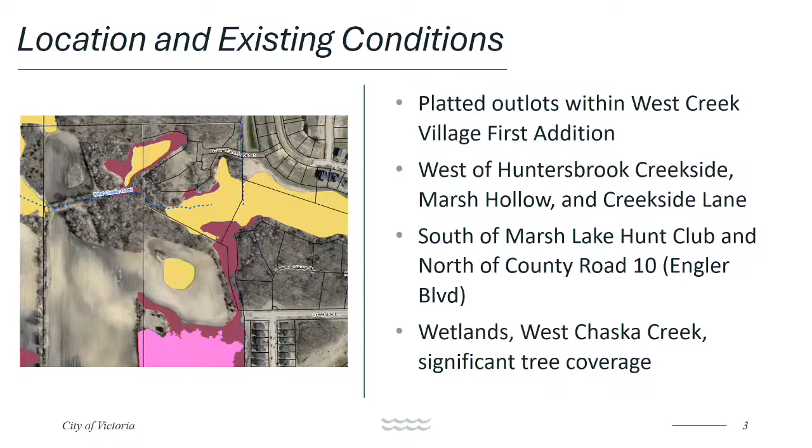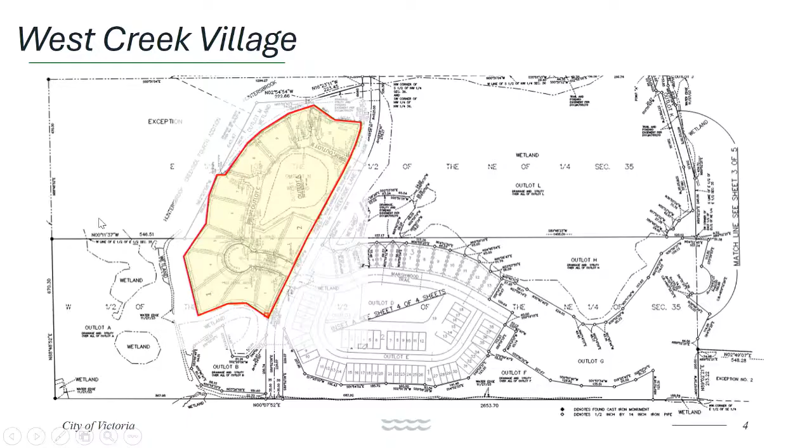There are some portions of wetlands on site, and a portion of the West Chaska Creek also runs through the area, with pockets of tree coverage. Here are the 13 lots that were part of the West Creek Village development on the north side of Creekside Lane. The rest of the area is proposed to be outlots for stormwater and wetland preservation, which align with the approvals for the West Creek Village development.

Six or seven of these homes are proposed to have access on a public cul-de-sac stemming from Creekside Lane, and there will be three private lots on a private drive.

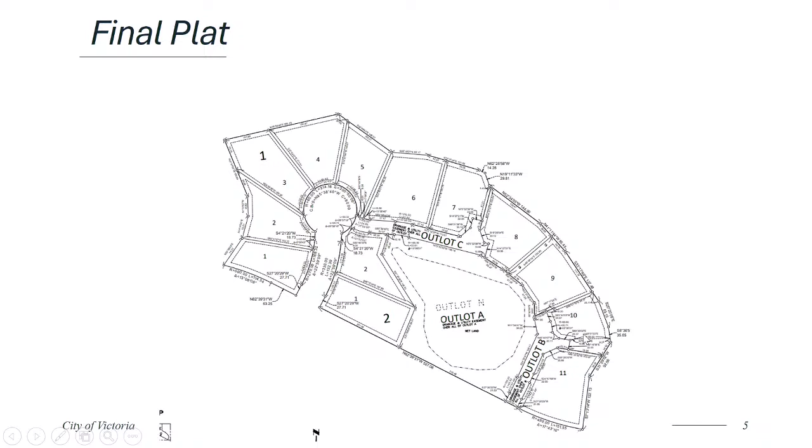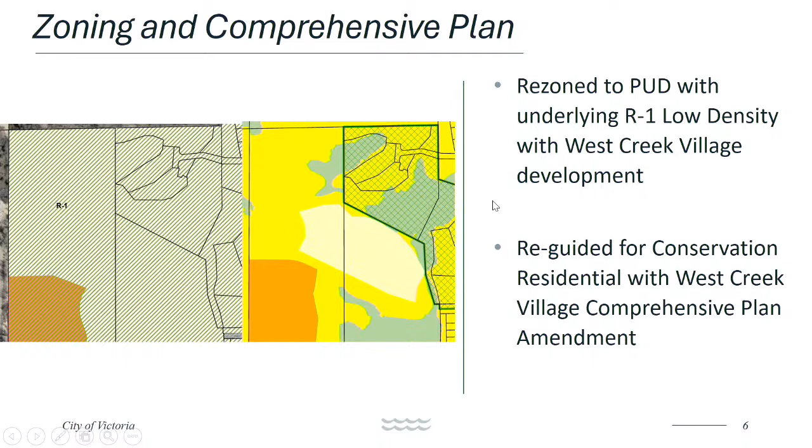For the zoning and comprehensive plan, this area was rezoned to R1 low-density residential, or actually planned unit development with underlying R1 low-density residential. That was done with the West Creek Village development when they received their preliminary plat approvals. They also had the area guided for single-family homes changed to conservation residential with that development, and that amendment was approved by the Metropolitan Council. The reason for that change was to have the higher area home lots within conservation residential, and also because they are within the Shoreland Overlay District, preserving some of the natural amenities out in this area.

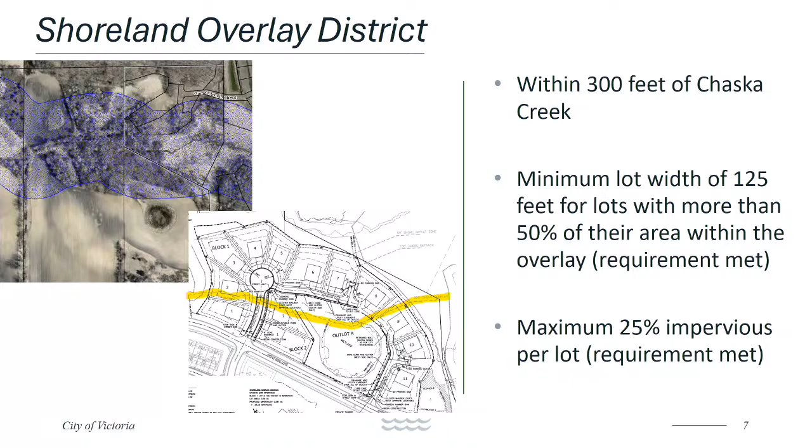All of these homes were required to have a minimum lot width of 125 feet if more than 50% of their area was within 300 feet of the creek, and they all have to comply with the maximum 25% impervious surface per lot. The applicant has verified that all of the lots within 300 feet of the Chaska Creek would comply with that requirement.

For park dedication and pedestrian connections, they have sidewalk connections from the cul-de-sac that connect to the trail along Creekside Lane. They also have trails within the larger West Creek Village development on the south side of the site, which you may recall extend over to the Marsh Hollow neighborhood, so there are various walking amenities in this area.

There is also a private park located next to the townhomes, but it's likely assumed that anyone living in the single-family homes will utilize the Marsh Hollow and Huntersbrook parks when those are developed in the future. Regarding park dedication, their requirement per our code is 0.606 acres, or about $63,700 in park dedication. We anticipate the fees, since no park amenities are proposed with this final plat.

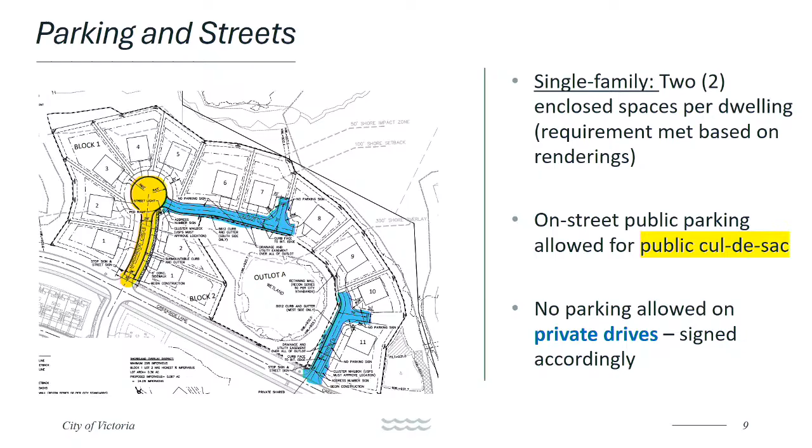Looking at parking and streets, each single-family home is required to have 2 enclosed spaces per dwelling. Based on the renderings provided, we anticipate that to be met. They also have a public cul-de-sac which would allow parking on both sides, granted they don't impact any driveway placements. The private drives would not be allowed to have any parking on them and would be signed accordingly.

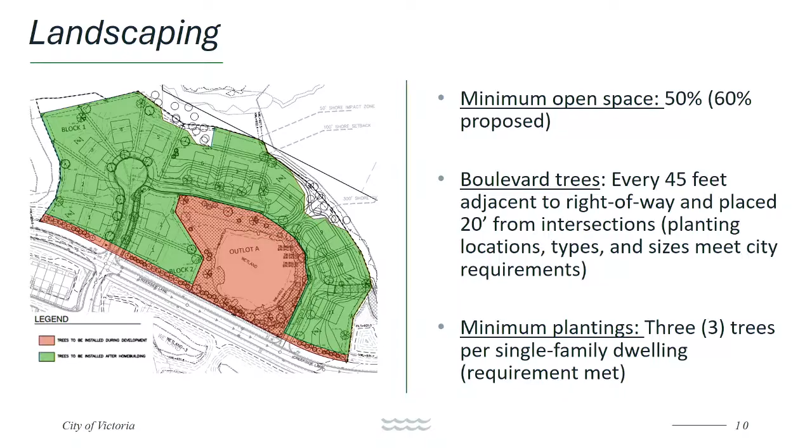Regarding landscaping, there's a code requirement of a minimum of 50% open space. They are proposing 60%. They are also providing boulevard trees with spacing, type, and sizes that meet our requirements, and they're providing the 3 plantings per single-family dwelling as required.

Regarding tree preservation, we allow 20% removal without mitigation or replanting throughout the site. They are proposing to remove 64% of the existing tree coverage after the West Creek Village removals, so their mitigation requirement comes out to 456 inches. They are replacing 337 and a half of those, leaving 118 and a half remaining. The applicant is proposing to contribute a cash fee to the city's tree fund in lieu of full replacements for this development.

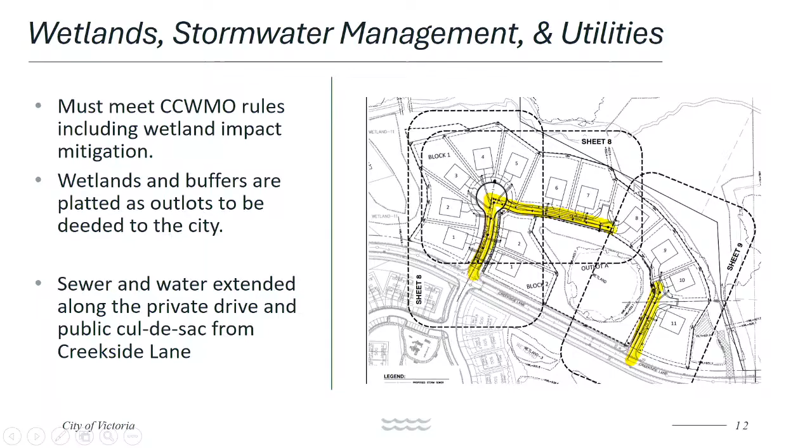For wetlands, stormwater management, and utilities, they must meet the CCWMO rules, including wetland impact mitigation. They are proposing to place wetlands and buffers within outlots deeded to the city, and the sewer and water would be extended from Creekside Lane and down the private drives to serve those new homes.

With that, I have some suggested conditions for the city council to consider this evening. We don't have any unique standards here—these are all of our boilerplate requirements, such as providing a letter of credit, getting all necessary permits, complying with the plat opinion, and entering into a development agreement, things like that. So I only have one sample motion for you this evening. Staff can stand for any questions, and the applicant is in the audience tonight as well.

Thank you very much, Mr. McCann. Those private streets—will those be maintained by an HOA? Correct. Okay, very good, thank you. Council, other questions or comments?

Gone through a lot of this with them. I don't think there's anything that jumps out at me.

Anyone else? I guess I just have a question about the parks. You said the likelihood is probably the two parks we've been discussing and designing. I know they can ask for fees in lieu or park dedication fees. I'm just wondering if there's any type of partnership there, since they might be going toward their lake, where that could help us with those two parks more than just this amount. I don't know if that's even a possibility, but we're looking at building two big parks in that area, and if this area is going to use it, I know it's not a lot of homes, but to share in that. We've talked about trying to do more to take care of our parks and build them, so I was wondering if there's anything out there we can do.

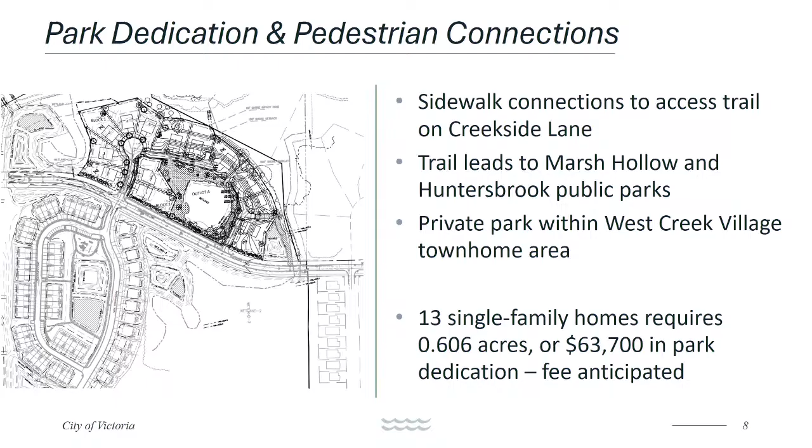Thank you. Very good. Any other questions, comments?

I want to go down the state statute. Is there a limitation on what we can charge under state law, or is there not? Mayor and Council, it's a great question, and it's been a hotly contested topic. There is a court case out there arising out of the city of Burnsville that sets parameters around what's legal, what the courts have said is legal. There is a generally held view that the court's sustaining of Burnsville's amount is probably near the top end, but there is no statutory maximum on that, though there is a perceived maximum based on that court case.

Thanks, Greg. Sorry, I kind of jumped in when you were getting to that. That's great, I'm just actually moving on to a different topic than the park dedication.

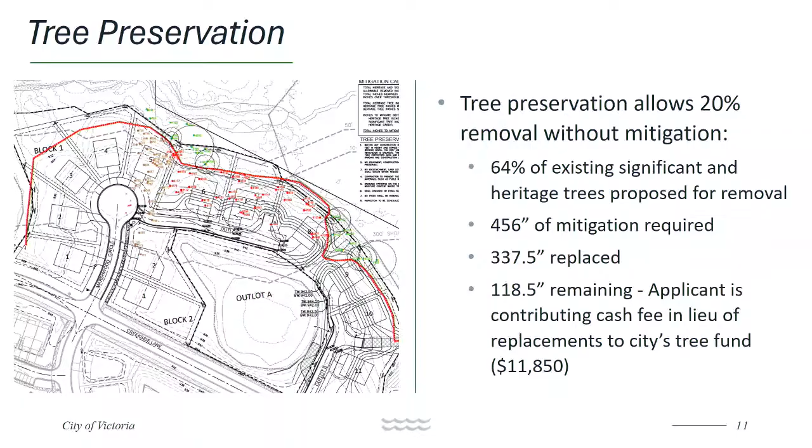Any other comments, thoughts? I guess I raised my eyebrow to the amount of that 118.5 inches remaining that they're going to pay, but then I kind of think, if there's not enough space for it and it's going to cause issues, then... we want as many trees as possible, but it's got to also fit.

Very good. All right. Seeing no further discussion, I will entertain a motion. Adopt the resolution approving the final plat for Enclave at Huntersbrook. We have a motion. Can I get a second? Second. We have a motion and a second. All in favor signify by saying aye. Aye. Any opposed? Motion carries.

Our next item on the agenda this evening is item 6.5, to consider a determination of an environmental assessment worksheet or environmental impact statement for Bell Maple Farm. Kicking off this item this evening and introducing our consultant is City Engineer Kara Guerin.

Ms. Guerin, welcome. Good evening, Mayor, members of the City Council. We have representatives from Stantec here tonight that I will be passing this over to, but you have a detailed memo from Stantec in your packet. Stantec staff is going to give you a general overview, and then I'm going to share a little additional information about infrastructure planning, since that question seems to have come up in communications quite a bit around this topic. So with that, I'm going to turn it over to Courtney. Okay, very good. Courtney, welcome. Please introduce yourself for the record.

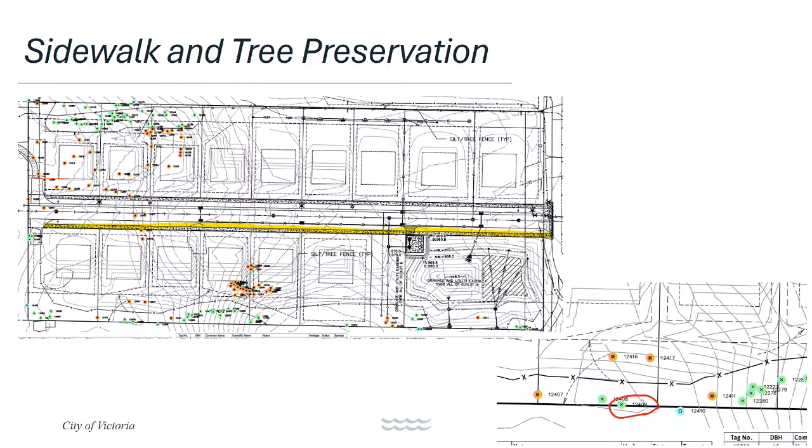Mayor, members of the City Council, I'm going to go a little bit high level relative to infrastructure planning because of the questions that have been raised about some of the decisions around particularly sewer sizing of the area. So big picture, sewer and water infrastructure planning happens often and behind the scenes and isn't necessarily something that's routinely reviewed with the city council.

It first begins with the evaluation of the city's comprehensive plan, which occurs every 10 years. So on a 10-year basis, your engineering team is reviewing sewer and water system expansions in order to serve development. That gets further refined as actual development comes forward, and then specifically on a parcel-by-parcel basis, sewer and water are installed to serve adjacent development.

And the reason for all of that is to make sure that it doesn't become cost prohibitive to provide city services to property as it develops. So we have to come up with an orderly, logical way to put that infrastructure in the ground.

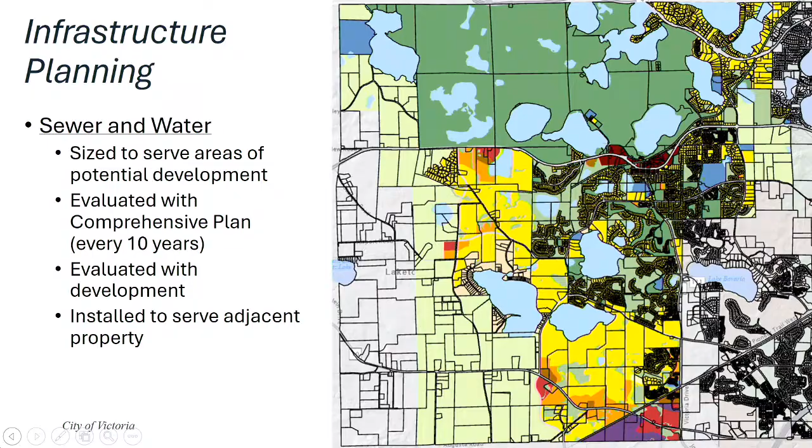But speaking of sanitary sewer specifically, you have, let's say, an 18-inch diameter pipe. Only so much waste can flow through that pipe. So the size of the pipe constrains how big of an area can be developed and served off that pipe. So we're having to make these decisions well in advance of when development happens. And I'm just going to run through a couple of examples for discussion purposes.

I don't expect you to follow exactly where I am on this map, but for reference, this is the Auburn neighborhood and the Lake Bridge neighborhood. We have a park right over here. As development occurred throughout, like between 2007 and 2014, a trunk sewer line was extended through this development, and we had to plan and size that infrastructure to serve essentially everything in our orderly annexation area.

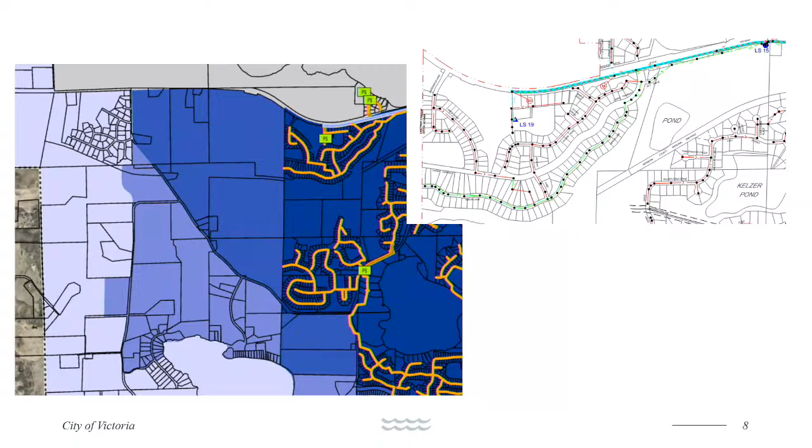So we have to make decisions about sewer sizing well in advance of development to make sure that we have a large enough pipe to serve the area.

Another similar broad scale look at that has been in our south growth area. The first piece of infrastructure that went in the ground that ultimately serves the south growth area went in 2003 as part of the Watermark development. So we put a 30-inch pipe in the ground on 81st Street by Kirklocken Park that ultimately serves this whole giant growth area. And finally, right now, we are looking at the West Creek Village development that you were just looking at, which extends a trunk line to serve this whole area.

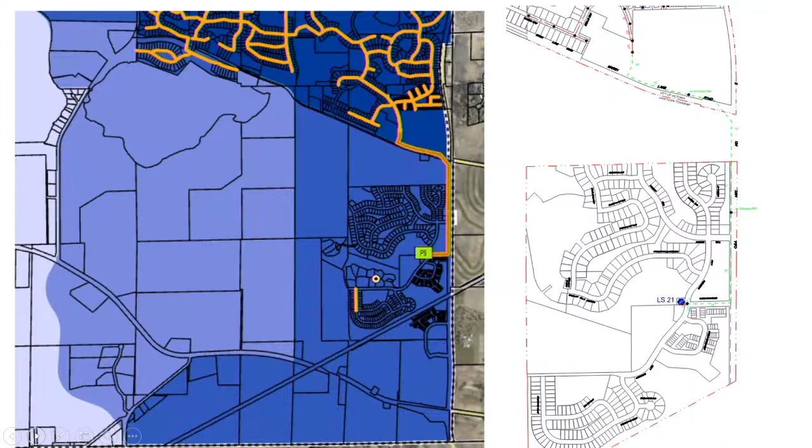But then even on a more micro level, so what you're looking at on the screen here is the Deer Run neighborhood. So this is Ridge Ponds Drive, which is that really long dead end that we've had a lot of conversations about over the years.

When this development went in the 90s, with the last phase being about 1993, a sanitary sewer stub was extended in this location to serve all of this area, and a roadway connection was built. There's actually pavement and curb and gutter out at the end of that neighborhood, with a short dead end that was put in to serve it.

If you recall, potential development for this property was just in front of the city within the last 6 months. So from 1993 until within the last 6 months, there had been no development activity. But we had to make those decisions at the time of the Deer Run development to provide both road access and sewer service.

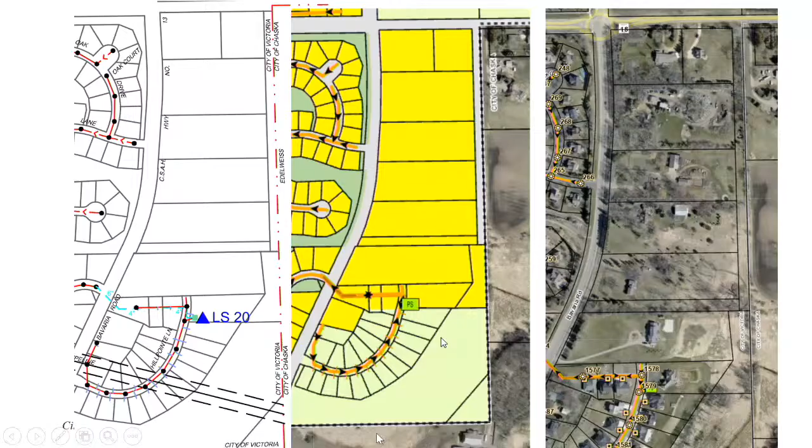There's also a road stubbed through to the property to the north. At the Ghost Plat time, the city took a look at how access would potentially loop back over to Bavaria through some of that Ghost Plat type work that we do often with development.

So moving specifically then on to the subject parcel. We are looking at this property in the middle, and they are looking at extending city sewer from Interlaken in order to serve the area. And so this area is all guided for single family residential.

So what that signals to us and Met Council is that we are planning to extend city sewer to the area. But as we look at how they should construct the specific infrastructure within this parcel, it's necessary for us to take into account what the potential for additional sewer connections might be in the area, so that what they put in the ground is sized to accommodate development around it.

I think we'll probably talk about this a little bit more on a future slide, but the area in question is pretty unique. This development to the north, Fox Hollow, has 3 individual homes on it. There exists a development agreement that says the lots can't be further subdivided, and there's actually an agreement between Chanhassen and Victoria also stating, and the developer also stating, that it wouldn't be further subdivided.

So the development potential to the north is somewhat limited, but at a minimum, we could end up with a situation where septic systems are failing and the city would be asked to provide sewer service to the existing homes. So 1, 2, 3, 4, 5, there might be a 6th up there. I don't know if that's an actual lot there.

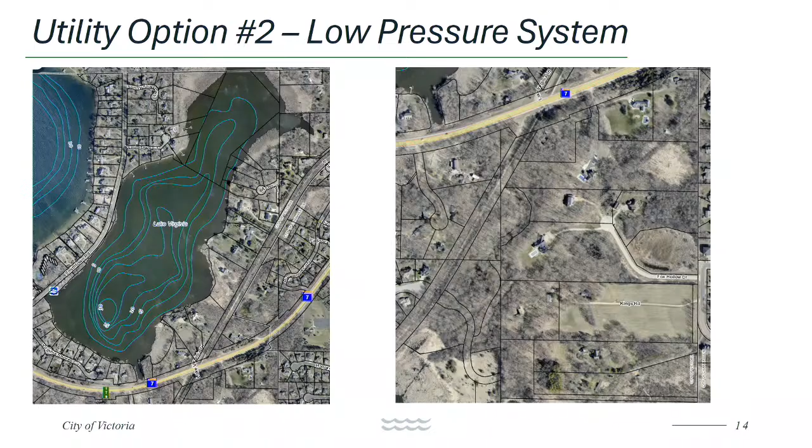So a couple of comparisons between the two options. The lift station option is a little bit easier to plan for system expansion in the future. Just by the nature of the system, it's easier for us to decide how big to make the wet well and ensure we're oversizing it enough for the area, compared to the low pressure sewer system, which has less capacity for system expansion in the future.

But given the constraints I noted on the development property to the north, with the 3 lots and the development restriction, we aren't necessarily seeing a need for widespread expansion. So we do think either system could work in this area.

A second area of difference is related to maintenance. The lift station option requires more maintenance for the city's Public Works Department over time. Public Works needs to come inspect and keep an eye on the lift station with some frequency.

The lift station would be attached to the city's SCADA system, so the city would get alerts and notifications if anything was problematic, like if power was out. But the city still inspects those systems regularly, and there are pumps associated with the lift station that the city would be responsible for maintaining and replacing over time.

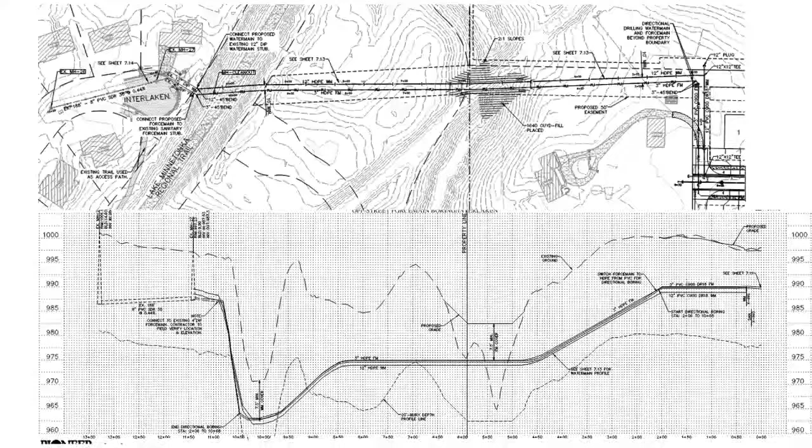When the 12-inch was put in Swiss Mountain back in the 90s, it was assumed that that 12-inch would loop through to Highway 5. Once the University of Minnesota purchased the Tamarack properties, that really made the prospect of putting a loop through there cost prohibitive. So the other alternative would be to look at looping it to the north.

We have sewer that's 40, 50 feet deep in parts of the city on our trunk system. We try to keep the lateral 8 inches under 25 to 30, so they were working within those parameters when they tried to come up with a route through here for this. Okay, thank you.

Just a couple questions from Member Rife on the lift station versus the low-pressure system. I think I understand the pros and cons of both, for the most part. I understand we're not first of a kind for the low-pressure system in Victoria, we have a few. How about around surrounding areas, where are we at with that? I know everything's different outside communities, but we also need to think about that.

Sure, so as usual, I limit my expertise to the city of Victoria relative to surrounding communities. But these are not uncommon systems. They're really common in lake areas where you're dealing with topography that creates a lot of challenges. It's a pretty typical installation.

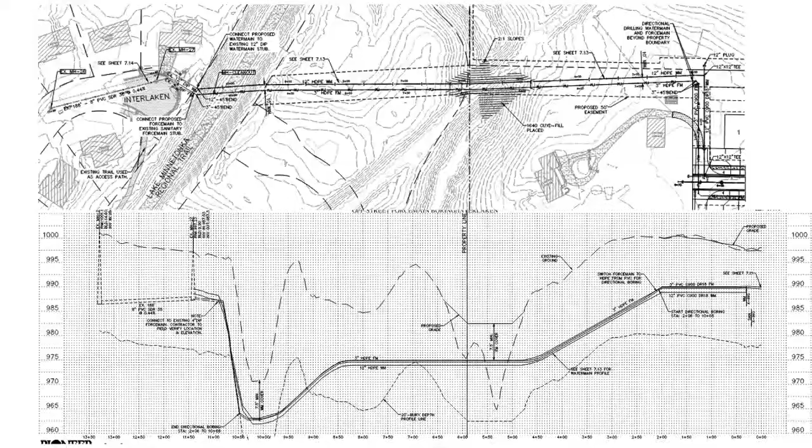And then, am I correct that if we went with the grinder option, any future development in the future would all then have to be on grinders as well, since we're not choosing the lift station option? That is correct. Any additional development in this area would have to have the same low-pressure sewer system serving it.

Do we want to continue on the topic of the sewer, or do we want to have Brian finish his presentation? I have a question about Fox Hollow Drive and those properties - I think that's somewhat relevant to the sizing of the sewer. Why don't we go ahead and let Brian finish up his presentation, and then we will circle back to that question. Thank you. Sure, thank you, Mayor and council members.

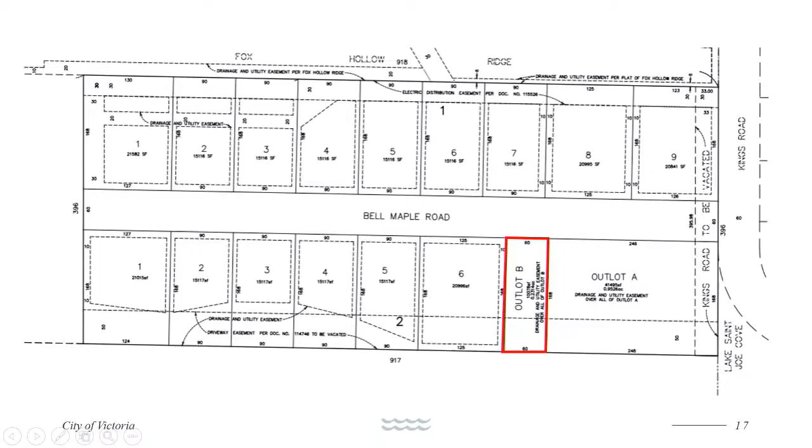So that was item 3 of 4 on the list for consideration. The last piece is regarding parkland. Previously at the January 26th meeting, when this was reviewed by the city council, this area noted now with a red outline labeled Outlot B was previously right-of-way for the potential of the properties to the south to develop, so that they would have a way to have a public street connect to Bell Maple Road and then to the remaining areas eastward. So when we're looking at parkland here, we're having 3 options being considered. The first option is changing that right-of-way designation to an outlot and have that being a temporary park, and then that park would go away and become a road in the event that the properties to the south ever wanted to develop. So that is option 1.

Option 2 is if the city council chooses the low-pressure grinder system that was just discussed, maybe there is a small outlot that could be carved out here for a small permanent amenity for the neighborhood.

Maybe a patio or a bench or something to be considered. It's not a large area, so you'd have to be thoughtful in what goes out in this area, but that is a more permanent solution.

You could do any blend of these 3 options pending your decision on the sewer system being discussed tonight, but these are 3 options that staff came up with in coordination with the applicant on how this parkland issue could be resolved for this area.

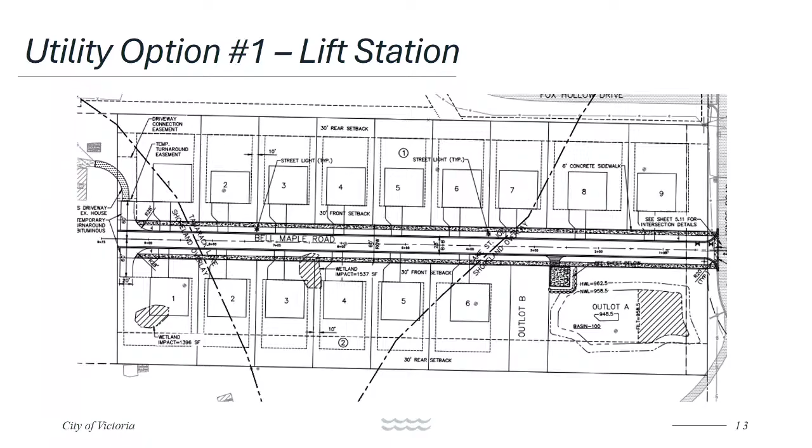Is that Fox Hollow neighborhood in Victoria or Chanhassen? Mayor and council members, that is within Victoria. It is.

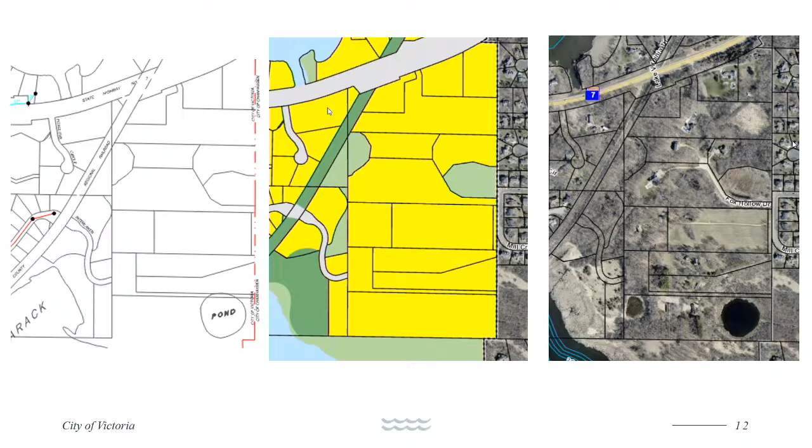Anything else, Councilmember Evansky? Any other thoughts? No, I mean, I think some of the other things we raised, like parks and things like that, we can get to where we were. But with respect, if we're going to continue talking about how we're going to handle the sewer treatment, to me it's very evident—one option. Why don't we go back to that list of decisions we need to make here, and we'll take those one by one.

So, questions, other thoughts on a lift station or a low-pressure system? I guess I am in favor of going with that low-pressure system. I think it's a reasonable, cost-effective way to get sewer service to those homes. And I do understand Councilmember Evansky's point about thinking into the future, but I also know that the topography gives us a bit of a challenge as well.

So other thoughts on lift station versus low-pressure system here? Oh yeah, Mr. Hilliard, please. I wanted to clarify something that perhaps we didn't do a good job of clarifying.

With these E/One grinder systems, the 3-inch force main that's going all the way over to the Interlaken cul-de-sac is sized for up to 60 homes. There's going to be stubs provided north and south, and the manufacturer says you could easily put up to 60 of these grinder pumps on that system for future expansion. So it is in no way undersized for this area. For what could be done or would likely be done, this system would easily provide the capability.

And regarding the power outage, the plan we've been going with is to put backup generators on each of these homes to account for that. The backup generator would keep things going. I'd say in a quarter to a third of the homes we're building now anyway, our customers are asking for backup generators just because they don't want their meat in the freezer going bad, and all the various reasons. So we could counter that concern with a backup generator, and we're happy to require those if you want on the homes. But I think the system would be plenty capable.

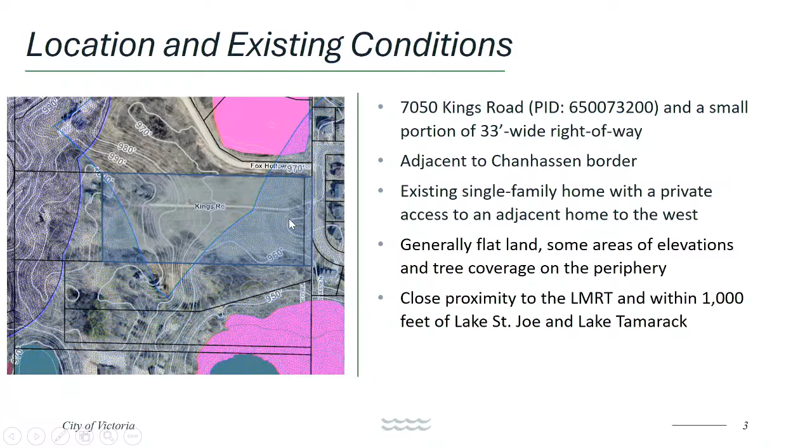Okay, let's go back to our sheet. Do we need to take all of these items separately, or what's our plan here? Mayor and council, I would think you'd invite a motion that addressed all of these in a single motion. That seems like the most expedient way, but that's your call, Mayor, ultimately.

So do we just need consensus on lift station versus low pressure, or do we need that to be a motion? If I understand, city planner, your resolution contemplates that these decisions will be incorporated into the resolution. Correct. And so I guess I'm contemplating that somebody would make a motion to approve the resolution with lift station or low pressure system, with temporary parkland or not. So a single motion that incorporates the decision points here that all go into the resolution. Got it, thank you.

Let's have a conversation about parkland. Can you go back, I think, to your... actually go forward one more, and one more. Thank you, I thought there was something that I saw that I wanted to ask a question about.

Oh yeah, I don't know if we see it very often, but drilling under the regional trail, how likely is that? I mean, obviously Carver County could say no, but generally speaking, have we seen that type of request before? Do they generally say yes, that's fine, go ahead and do that? Councilmember Roberts, Mayor, members of the council, Carver County just took ownership of the regional trail within the last year, so if it was the previous trail owner, they have permitted utility crossings in the past.

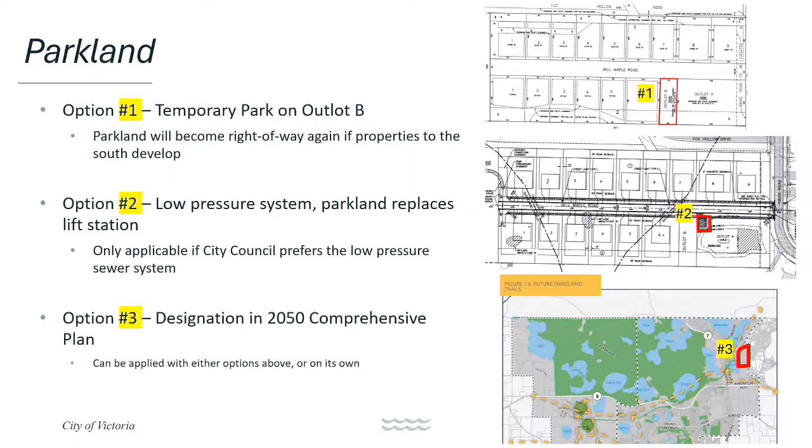And I would agree, I don't know that we want something that's maintained, it's just an open field. All right, any other thoughts on that? Otherwise, let's move on to our motions, and I will consider a motion.

Make a motion to adopt the resolution approving the preliminary plat for Bell Maple Farms residential development using a low-pressure system and temporary parkland, with a designation for a park in the area in the 2050 plan. Do you want me to combine the rest of these, or is that good enough?

Let's take these one at a time. So we have a motion, can I get a second? Second. We have a motion and a second. Any further discussion on this? We have a motion and a second. All in favor signify by saying aye. Aye. Any opposed? Opposed? Is the dissension noted?

Yes, ma'am. Very good. I will consider a second motion. Motion to adopt the resolution approving vacation of easements and right-of-way for the Bell Maple Farms residential development.

We have a motion. Can I get a second? Second. We have a motion and a second. Any further discussion on this item? We have a motion and a second. All in favor signify by saying aye. Aye. Any opposed? Opposed? Is the dissension noted? Yes, ma'am. Thank you. We have a third motion, please.

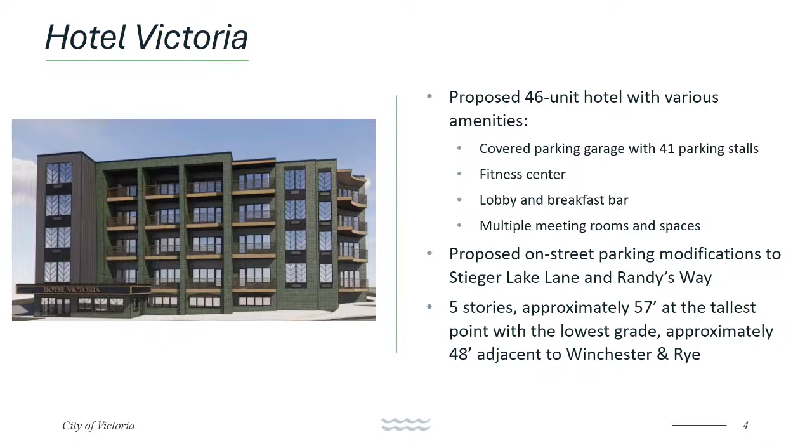The hotel itself is proposed to be a 46-unit boutique hotel with various amenities, including a covered parking garage with capacity for up to 41 vehicles with valet service. They're also proposing a fitness center, a lobby with breakfast bar, and multiple meeting rooms throughout the building. They're also proposing on-street parking modifications to Steiger Lake Lane and Randy's Way. The building is approximately 5 stories at the tallest point, about 57 feet, and closer to 48 feet adjacent to Winchester and Rye, which is how height is calculated in our Shoreland overlay district.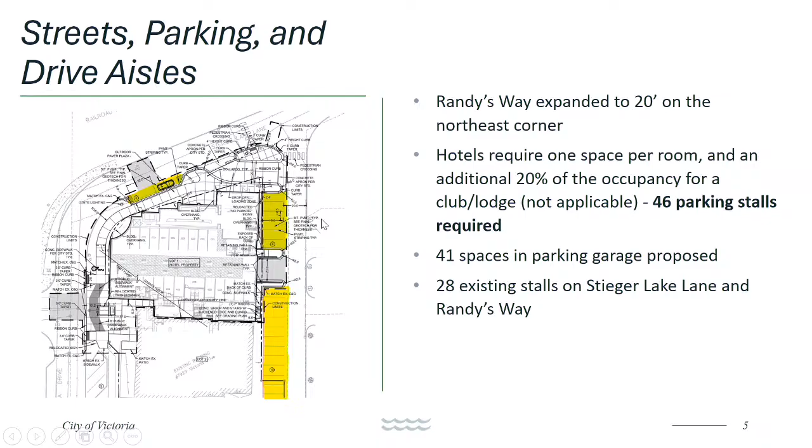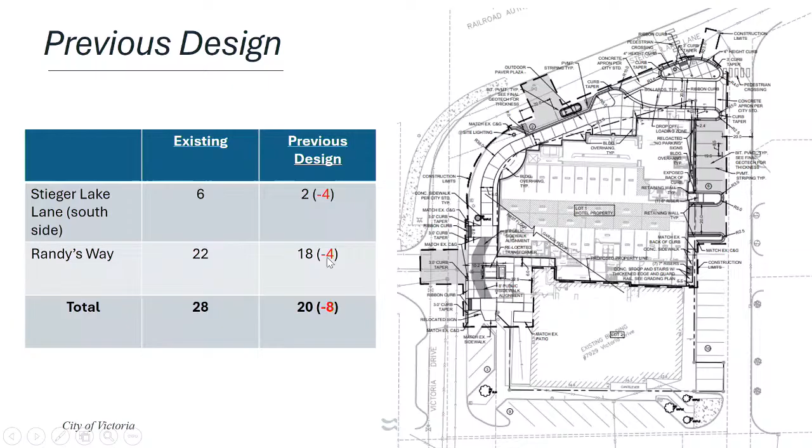They have since come back with a new design. In the old one, Stieger Lake Lane went from 6 existing stalls down to 2, and on the entirety of Randy's Way they went down from 22 stalls to 18. That's how we got to that negative 8.

With this new design proposed this evening, they're altering the north side of Stieger Lake Lane. There are 10 stalls existing there currently. They would incorporate bump outs and angled parking, resulting in 14 parking stalls—a gain of 4.

They've also added 3 additional parallel stalls on the south side of Stieger Lake Lane. Their mitigation only requires 1 additional stall, which they've incorporated adjacent to the entrance of the building. This gets them to a net zero of on-street parking, but requires some sidewalk removal, grading, and a 160-foot wide retaining wall—all within Carver County's property, since they recently took ownership of the Lake Minnetonka Regional Trail, making it subject to their approval.

These were all the conditions previously incorporated when you last saw the item, but we have some new suggested conditions of approval, including compliance with this net zero on-street parking plan, as well as receiving approval from Carver County for those modifications to the north side of Stieger Lake Lane.

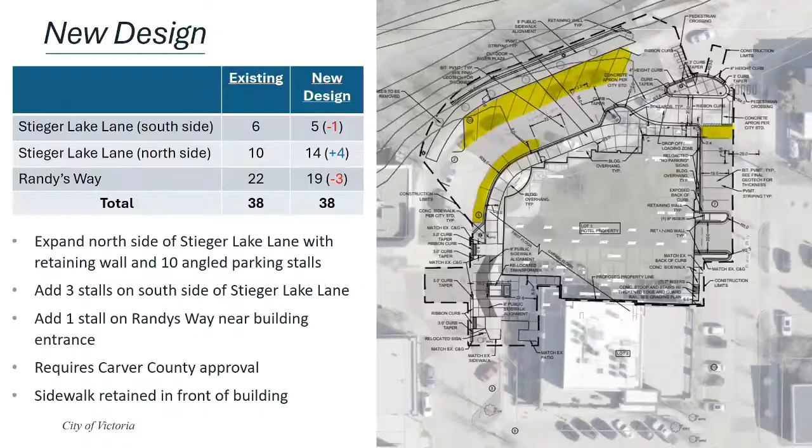Council, questions, comments, thoughts? At the last meeting, we all stated how much we loved the idea. We thought it was needed in Victoria and wanted to see it work. We just had concerns about some of the parking spots we lost, and now that we're back to net zero, I don't see any reason not to move forward. I'm glad we were able to work it out and make it work.

Any other thoughts, comments? This gets us where we needed to be. I agree, we're not taking anything away, we're leaving things as they are. I think it's a great solution, and this is more of a home run. This is going to provide positive benefit in that space to the city and its residents. I'm pleased we took the action we did.

Made the efforts to get a quality product. Thanks to staff, thanks to the applicant. I like home run, game changer, whatever you want to call it. I think it's great to figure out the parking side of it — that's important to everyone. I just think of the sheer benefit of bringing in wallets into Victoria and having them stay in Victoria. Excellent.

I have no comments to add on to all of that. I just want to make sure that if there's the ability for the shared parking piece, where there's a conditional use permit to get 5 extra spots, that we allow a vote or however we do that.